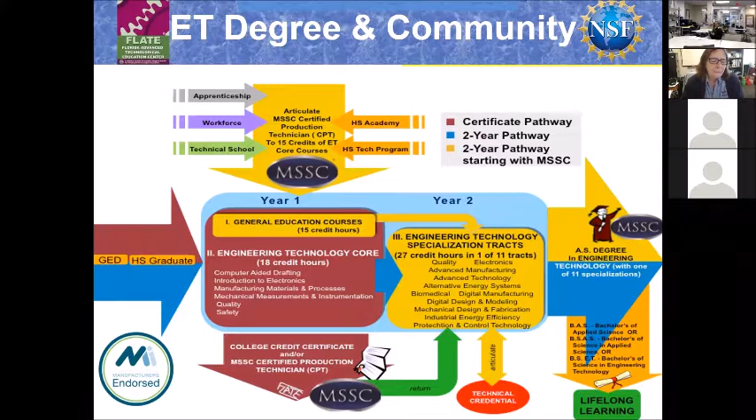What I'm really going to talk about now is some background on what's happening in Florida, as a result of a workshop we did about two years ago. It was hosted by St. Petersburg College and the faculty there. St. Pete College was one of those that offered digital design and modeling, and they have quite a nice facility there, on the Clearwater campus.

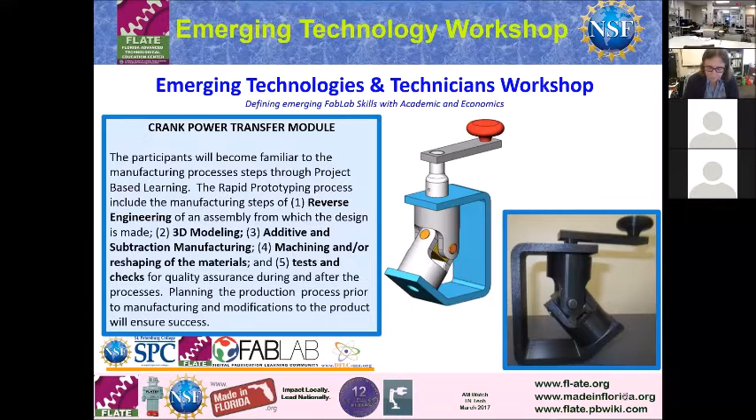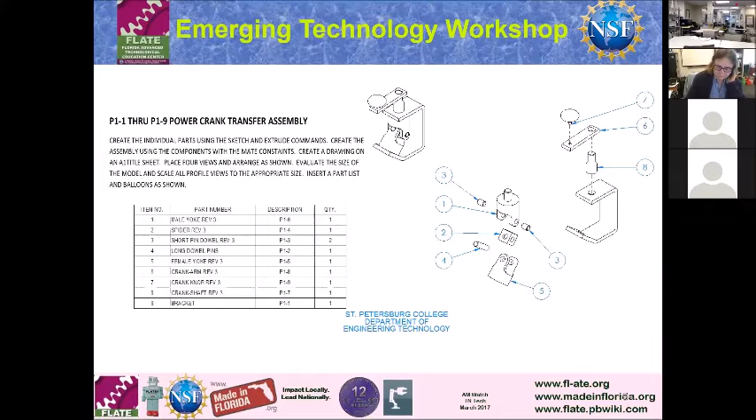This is just a slide filler to show some of the documents we produced along the way. We designed the little crank power transfer assembly and got a bill of materials together.

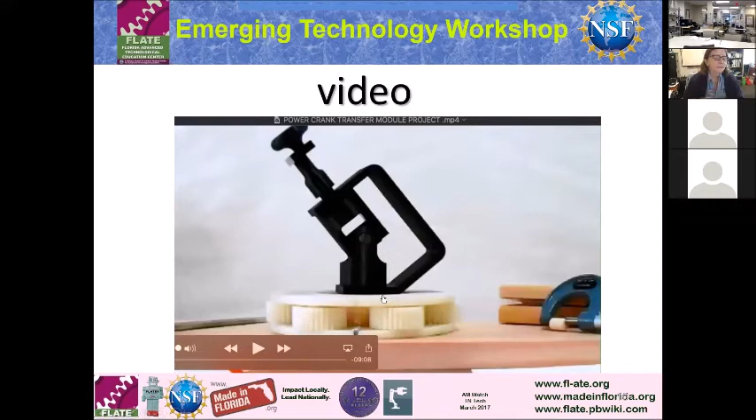Now I'd like to run through what we did during parts of the workshop. This is the assembly we worked on, in the planetary gear array at the bottom, that the black assembly is sitting in was the test. So we needed to reproduce this crank to run this gear system. We're going to do the crank power transfer module project.

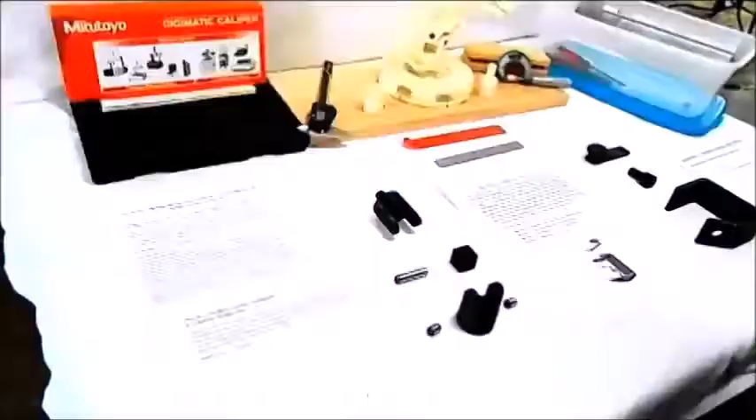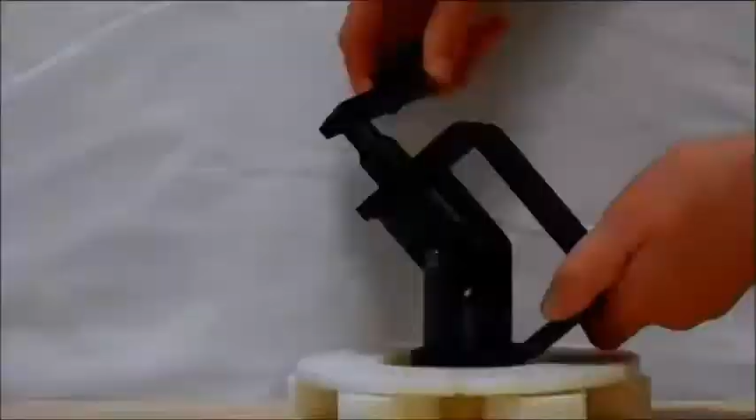The purpose of this workshop is to become exposed to the manufacturing process modules through project-based learning. We will cover the basic steps of rapid prototyping while turning our project into a finished product. The manufacturing process begins with reverse engineering of an assembly from which the design is made. Manufacturing processes can include additive, subtractive manufacturing, machining, and reshaping of material. It also includes test and check for quality assurance during and after manufacturing. To ensure success, it's necessary to plan the production process prior to manufacturing or making modifications.

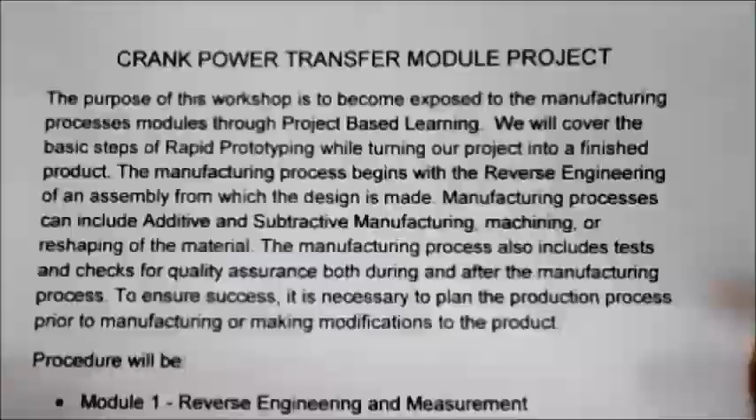The procedures will be Module 1, reverse engineering and measurement; Module 2, part modeling using SolidWorks, a 3D parametric solid modeling software; Module 3, creating the parts via 3D printing or CNC machining; and the final module, assembly and form fitting of the parts into the assembly.

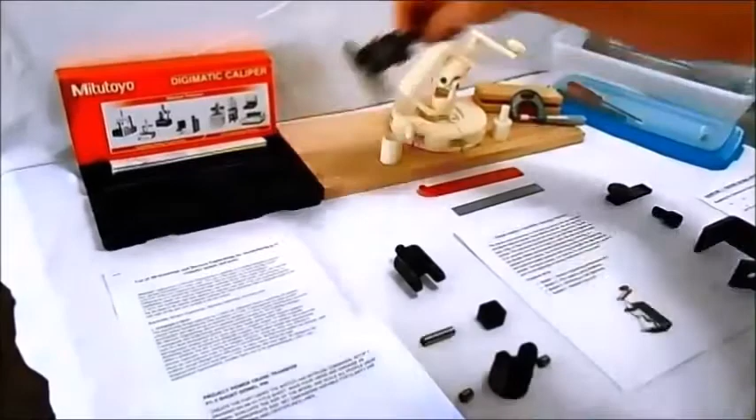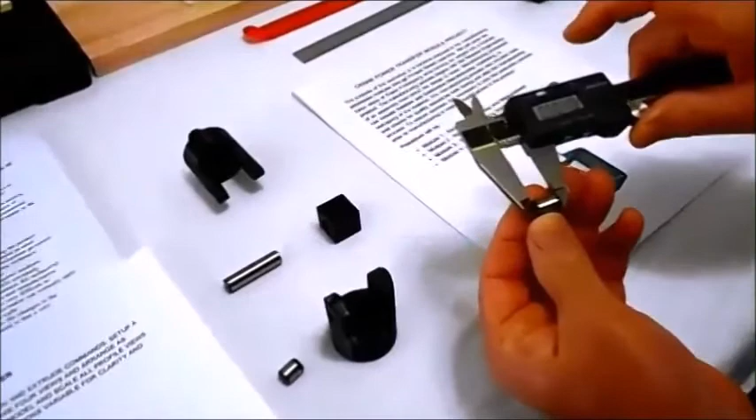The first thing we will do is measure and check the size and shape of the parts we're going to reverse engineer, including the length and diameter of the pin. We're going to note and document all sizes so we'll be able to modify and model these parts within SolidWorks.

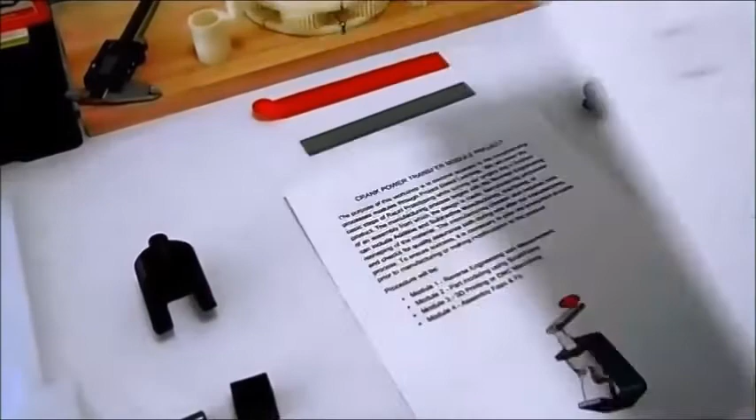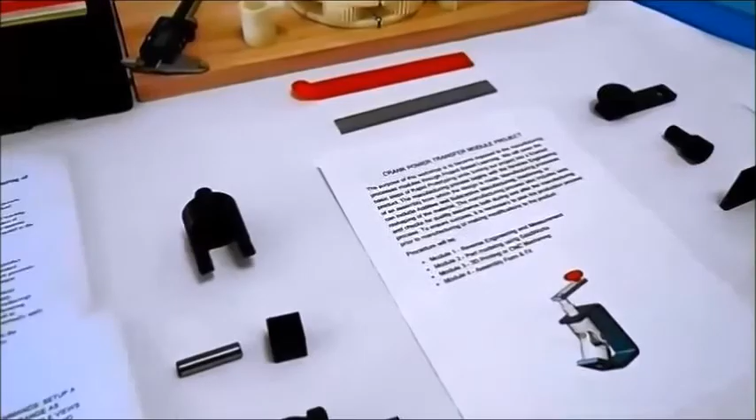Once we model our parts and determine our sizes and shapes, we will model those in SolidWorks — again the spider gear, and also our female and male yokes for this project. We will reverse engineer in many different ways.

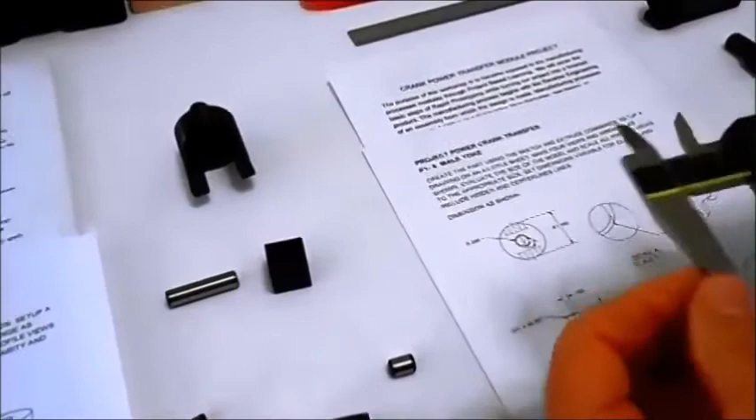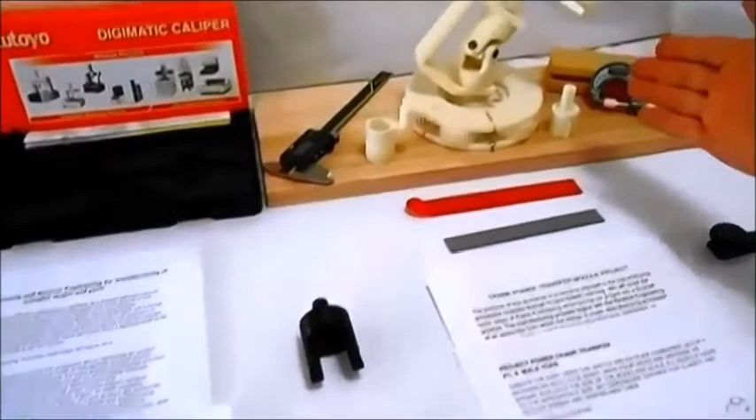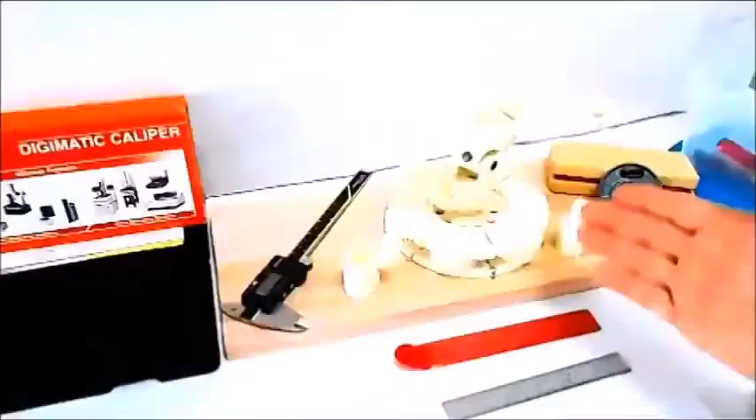Once we're done reverse engineering and modeling our parts within SolidWorks, we will take those to the 3D printer and create these parts. Once we get our parts created, we'll go in and assemble them for our final project, the crank power transfer, the purpose of which is to turn the planetary gear down below.

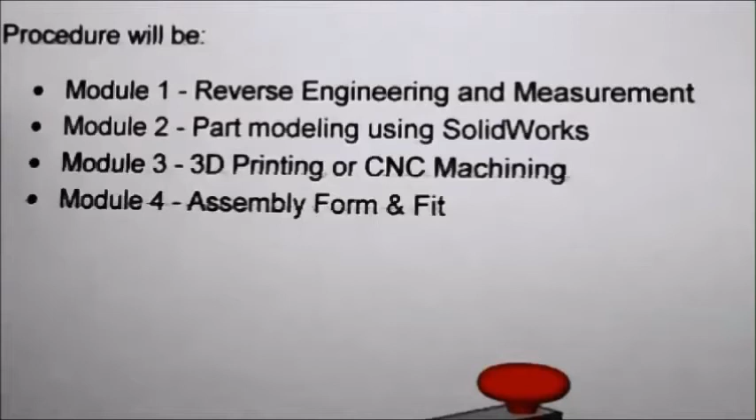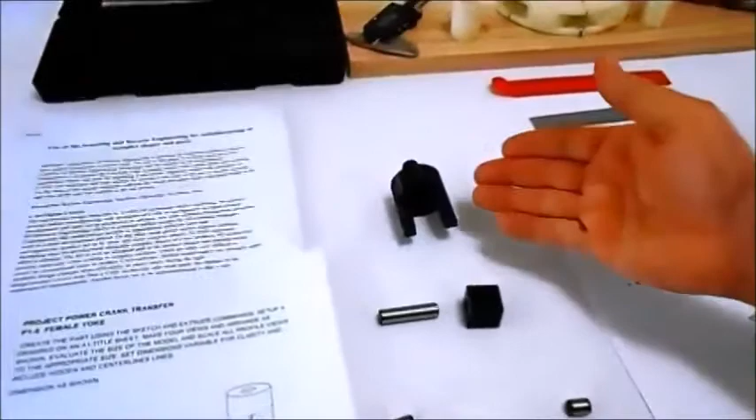So once we're done reverse engineering and modeling our parts in SolidWorks and 3D printing them, we will bring them together and assemble them. The first parts we will assemble are our spider gear and our male and female yokes with our pins.

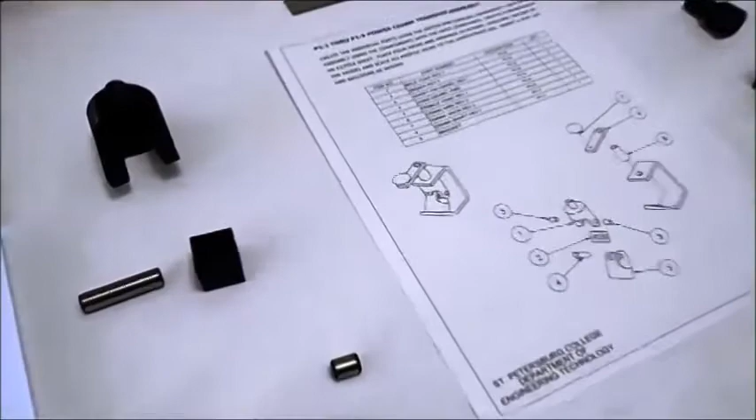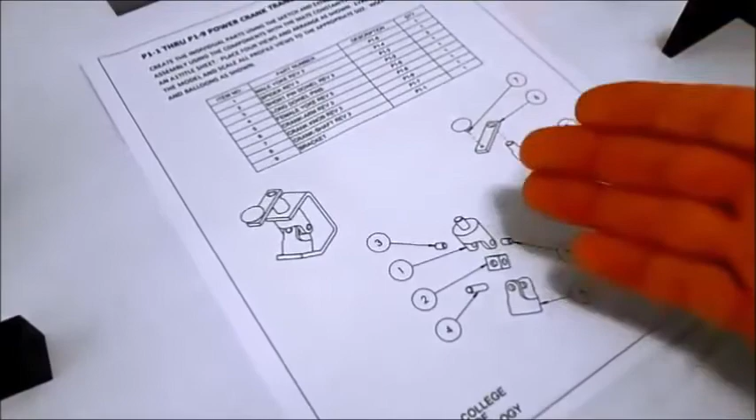Again, this is a picture of our assembled product and our modules. Our goal at the end is to assemble our product and then finish documenting the project in SolidWorks with an assembled and exploded view with balloons and a bill of materials.

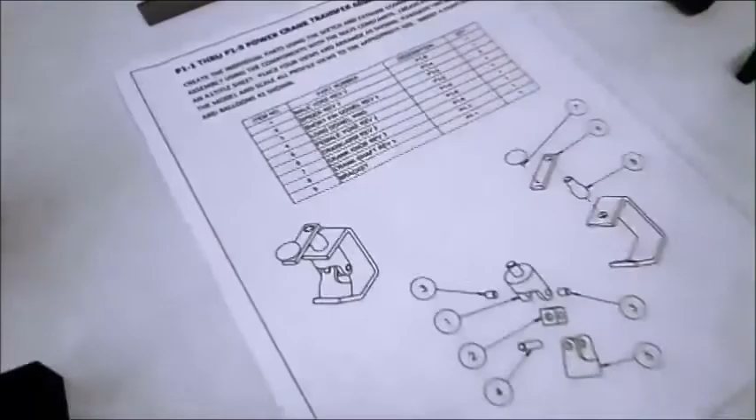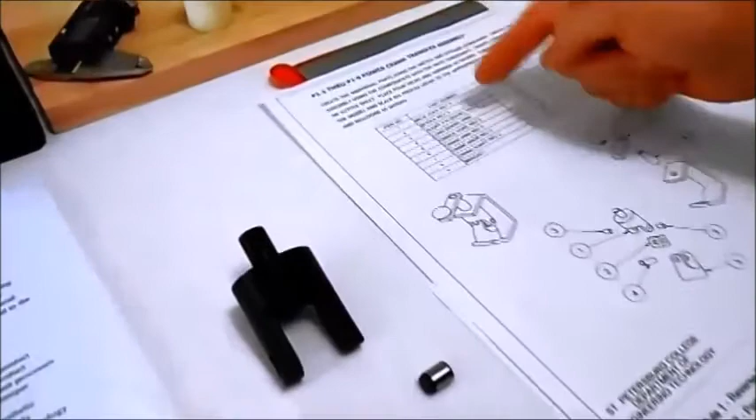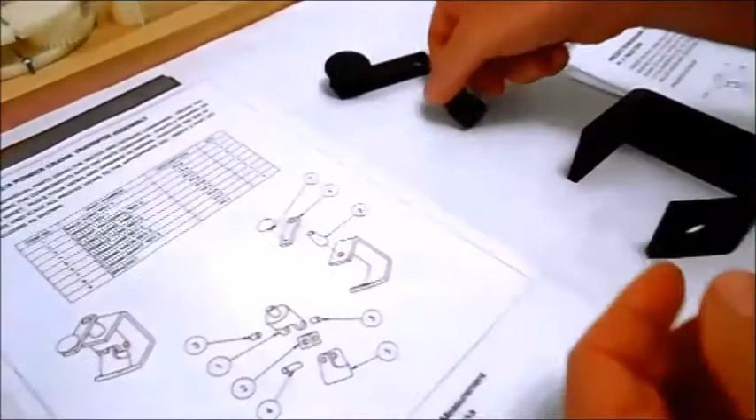This is the male yoke. These are our short pins. This is our spider. We've got our long pin. We have a female yoke. We have our crank arm assembly. We have our crankshaft, and our bracket, which supports all our parts here within the assembly.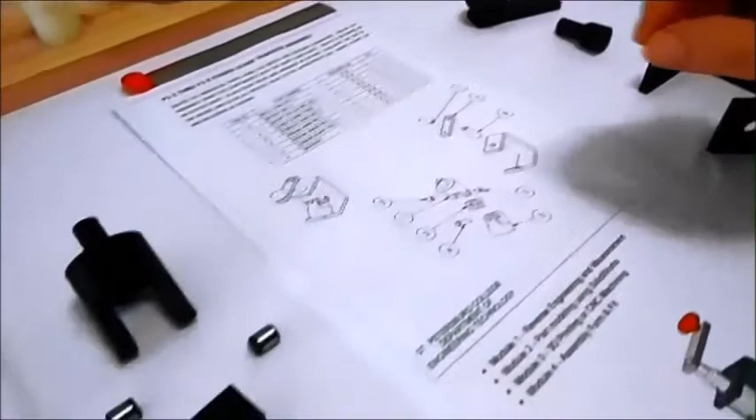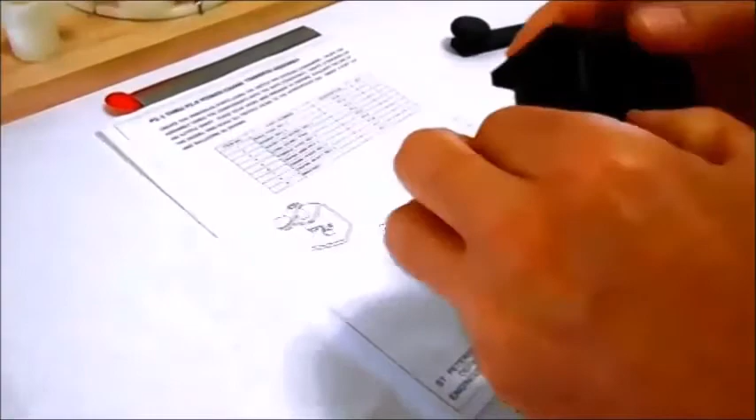The first thing we will do is assemble the male yoke with the spider using the short pins. Next we will insert that into the bracket, turn it on angle, and then bring in the female yoke.

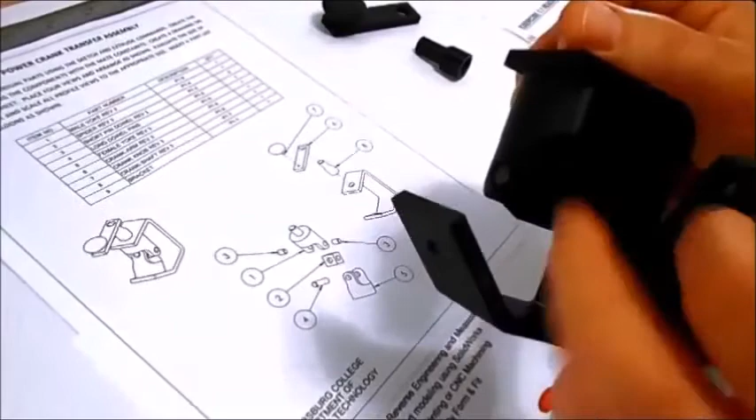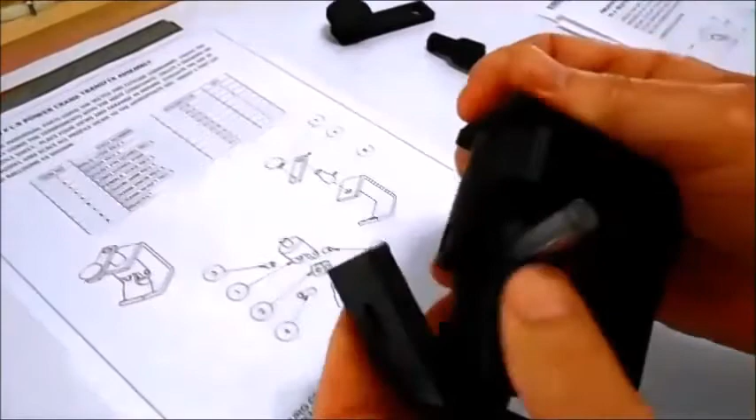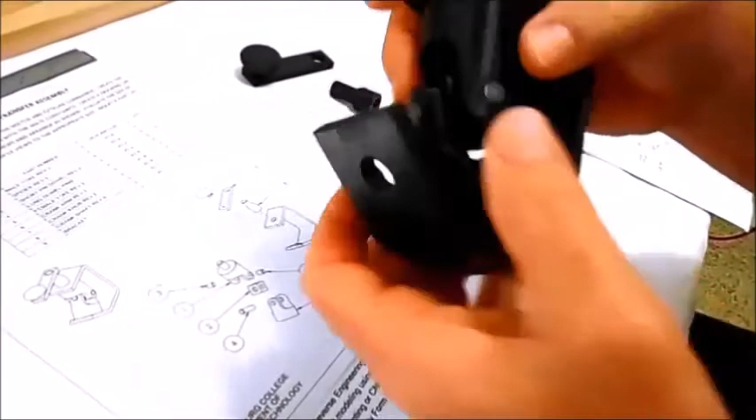And then insert the long pin all the way through. And again, we have rotation. Both the female and male yoke is attached to the spider gear. We can rotate and then place in position and alignment with the bracket hole.

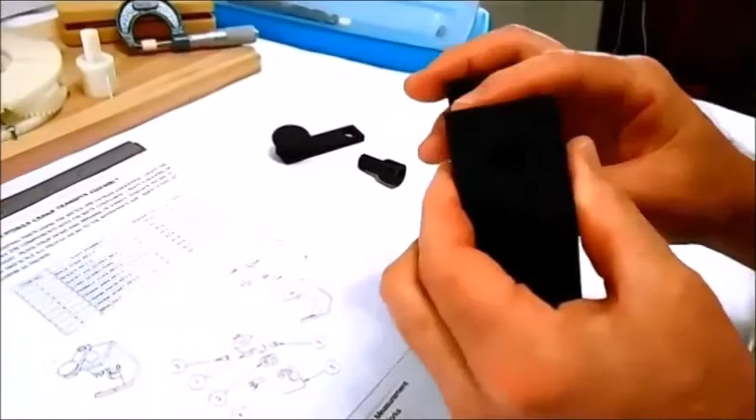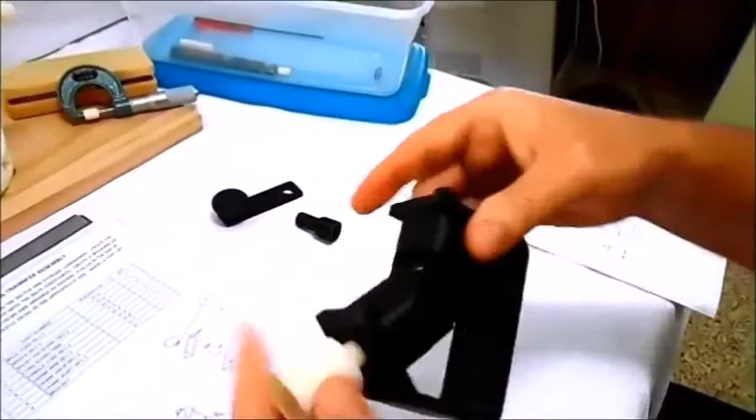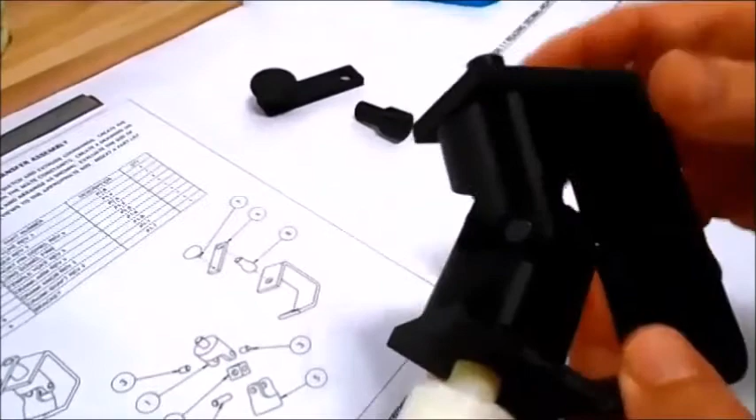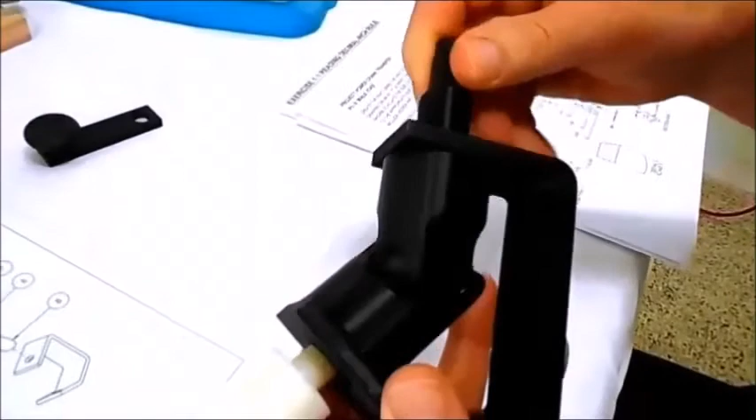All right, for our supporting shaft that goes into our planetary gear. Now that we have our female male yoke inserted with our spider gear, we'll come in with our crankshaft, and again with our crank arm and knob.

All right, we have it assembled, and it seems to fit good, and it seems to rotate without any problems.

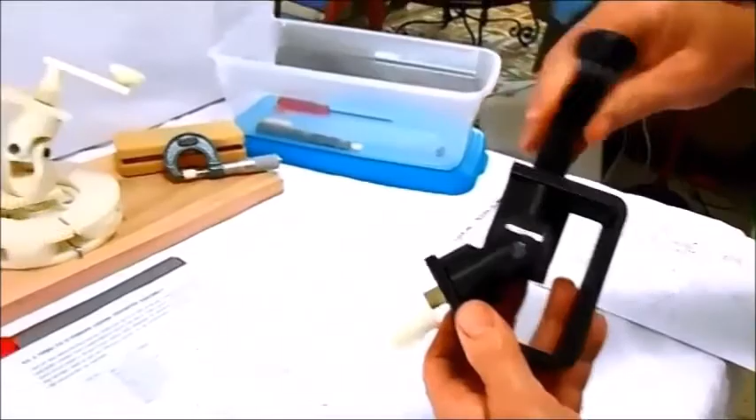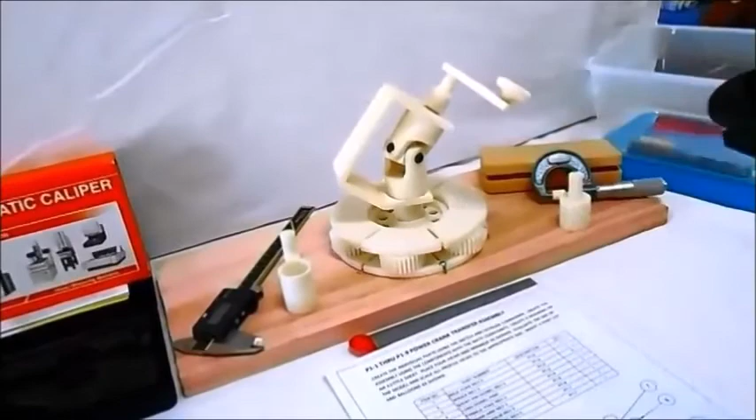Now that I have the power crank transfer assembled and it seems to turn without any hesitation or drag, I will try to insert it into the planetary gear to see if it works. So I'm going to remove the original power crank transfer that we reverse engineered.

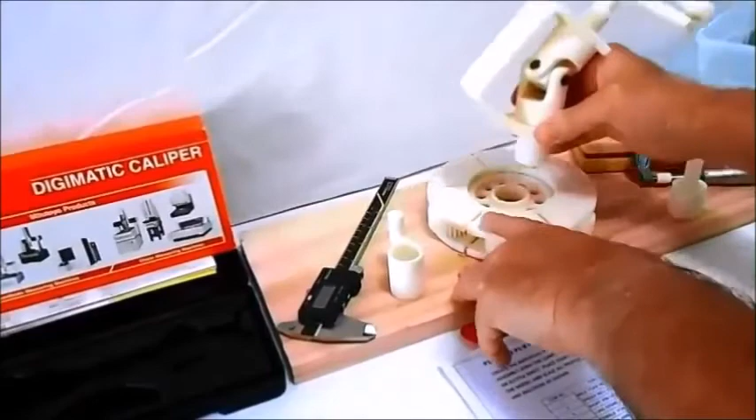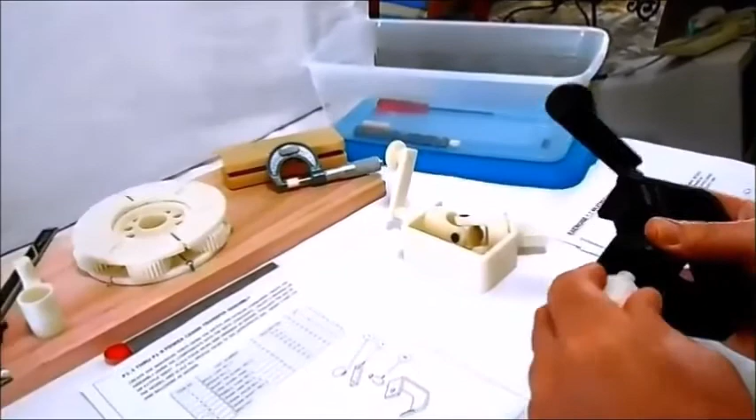And insert the drive shaft, and insert it into the planetary gear, and then see if it works and turns the planetary gear.

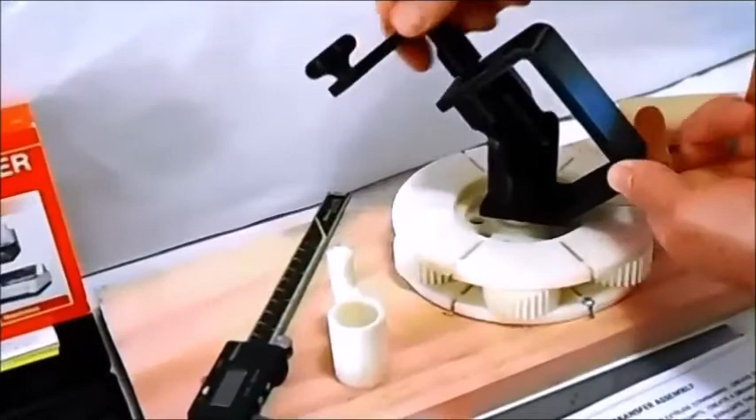And it seems to turn good, and it seems to power the planetary gear around in its circle of path. All the parts seem to fit. We have a good project.

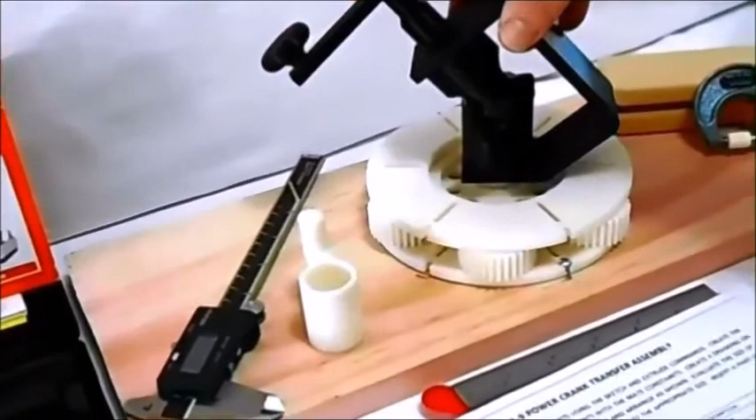Everything assembles, and now the next thing we'll do is simple modification if we have to, to finish this project up. If you take a look, here is the exploded view with all our parts.

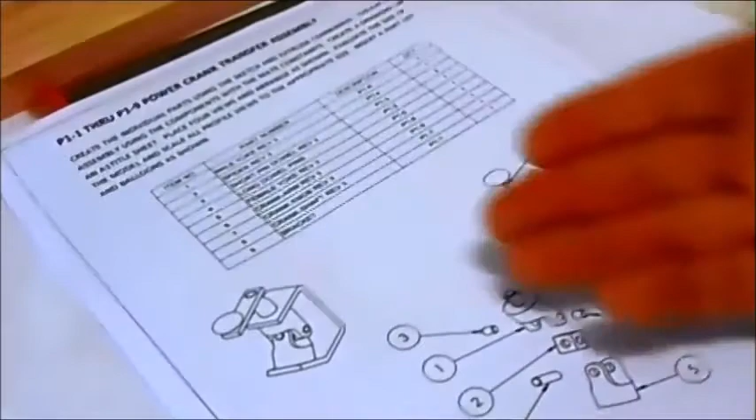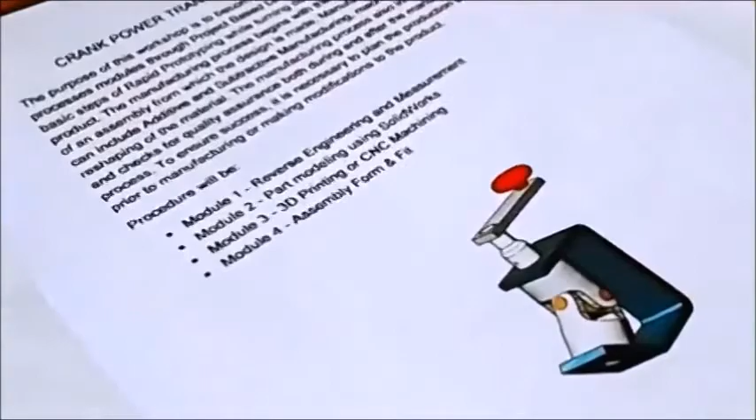Here is an assembled view with the BOM, bill of materials. And again, this is our goal right here, is to assemble, form, and fit. And again, we're done with our project.

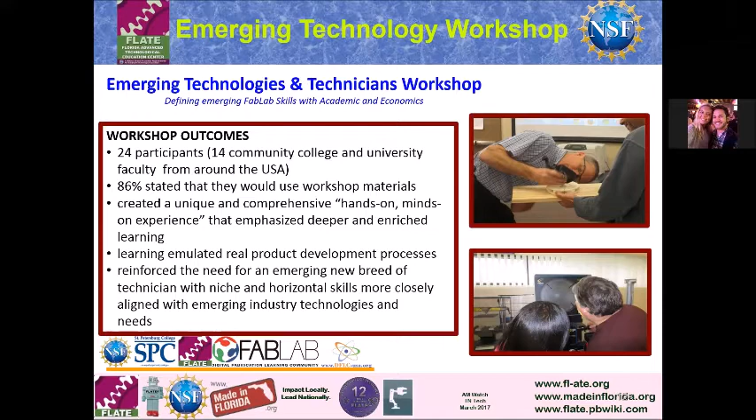So the idea, of course, was to have this build experience, which we already talked about. I think maybe I can move right to the next slide with a couple of the outcomes that we had for the academic point of view.

So we had the participants, there were about 20 to 24 faculty there, and we asked them what courses the processes that they used would align with, where they could use that part of this exercise for teaching in their particular classrooms. You can see CAD, drafting, and CAD including SolidWorks, 3D modeling came up in most of these discrete activities that we asked them to define, and a couple of other courses, particularly intro to engineering or intro to technology, and also capstone courses came up, that same kind of project-based learning course that many programs might have as part of the required curriculum.

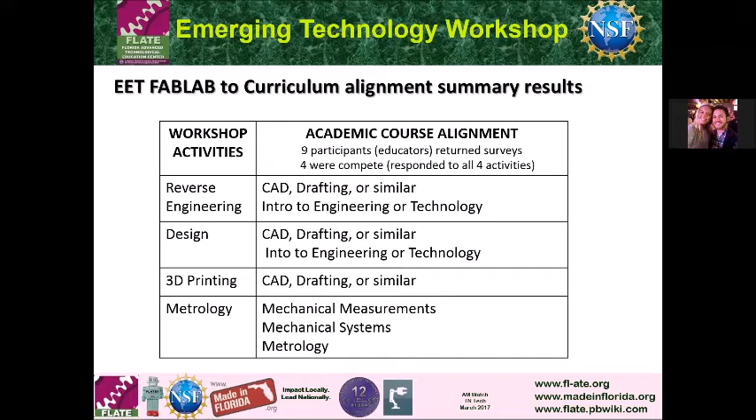And very specifically, the metrology aspects, the measurement using some variety of tools, although in the video you only saw him measuring with calipers. They have some optical comparators that were used, and CMMs that were also used in the processes during the workshop. So all of that technology may be part of a metrology course, introducing them in those courses, and using the project as a particular piece for a capstone course or an intro course were all possibilities that came up.

So we know that a couple of the colleges for sure implemented the project and tried some alignment with their different programs, some more successful than others. We didn't hear back from all of the participants, but quite a few thought it was a good opportunity to use fab labs or maker spaces that they had in their facilities to integrate into their courses. It did come up that there's a lot of logistic issues with that, depending on the openness of the facility, if it's open to the public, and scheduling, those kinds of things, if there's a fair number of students working, and that was a kind of individual institutional issue they would just have to deal with.

And one thing that's not on this list was also the supply. So if materials were used, that needed to be considered and figured out how those would be paid for.